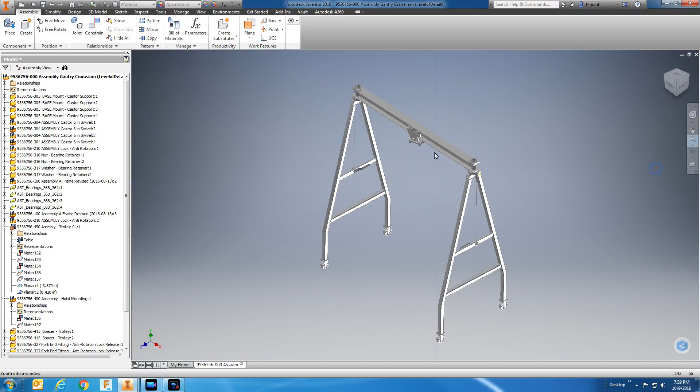So what I'm going to do is zoom in on a window here, and we're going to open this file, and open this A-frame. You can see this part here which we have added is shown over here as a 3 inch by 2 by 1/8.

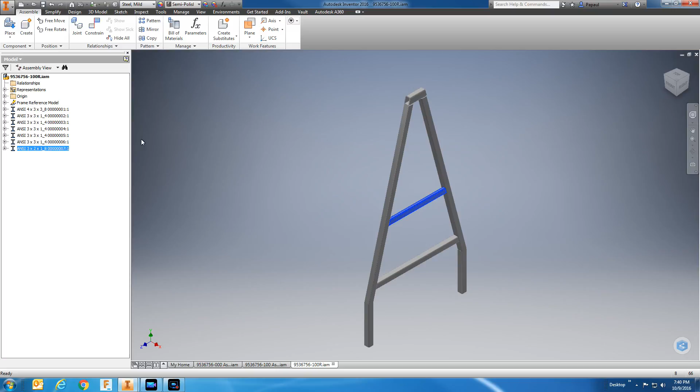It's drawn this way, but in fact it's a 3 inch by 1.5 inch tube in reality. So this tube has been cut and fit, and we're going to now close this file, go back to this one, and look at the detail that has been added here.

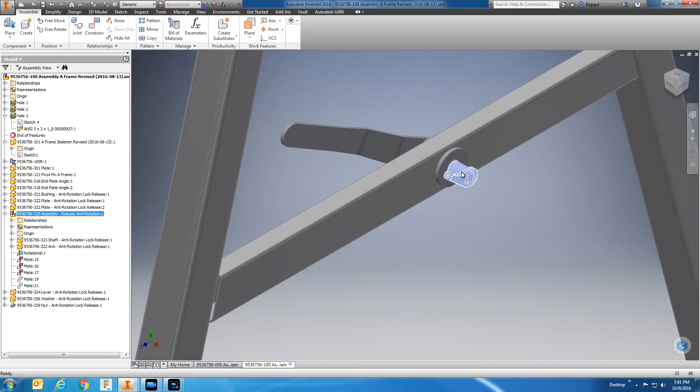So we're going to zoom in on a window again, right here, and you can see that this mechanism consists of a shaft assembly here, and we're going to open that and have a look at the components.

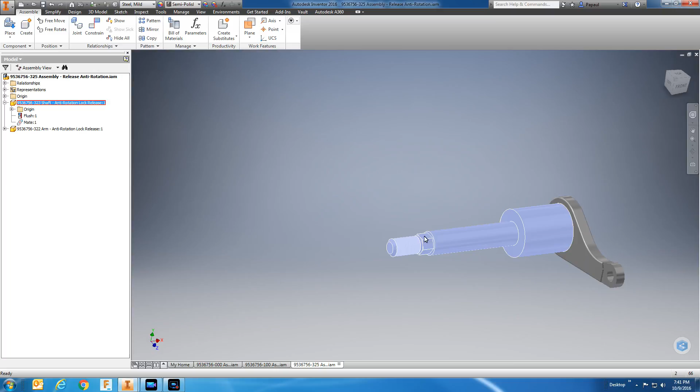So that consists of a shaft and an arm. The shaft has hexagonal surfaces here on which the lever arm will be mounted. It's threaded. This is 1/2 inch. This is 1 inch, and this guy here will be connected up to the anti-rotation lock release pin.

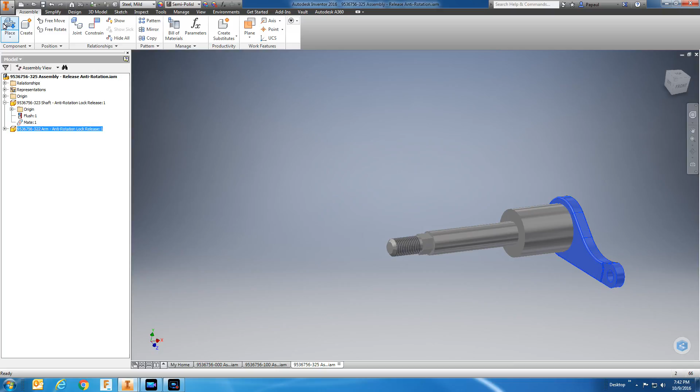So we're going to close this guy here as well, going back to where we were. So again, here's the lever, and we're going to rotate around and look at the other side of it.

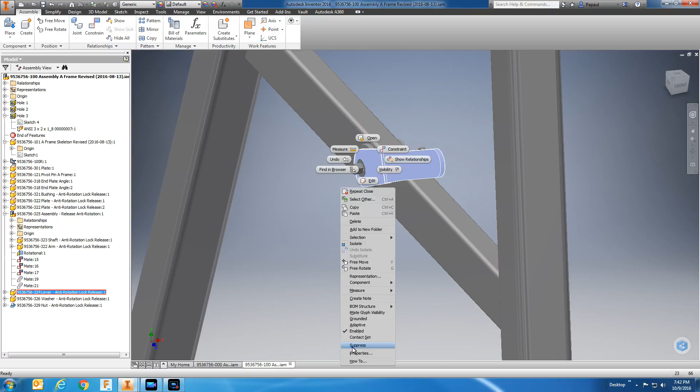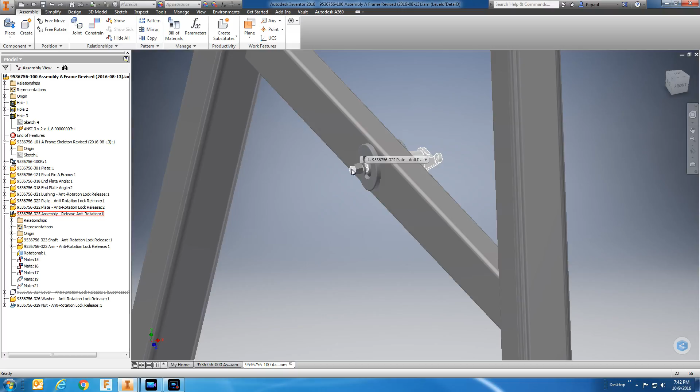We're going to suppress this component. Okay, well, let's save it then, if that's the way it wants to be. And we're going to attempt again to suppress this guy. And you can see that we have a washer here, and we're going to suppress this guy, suppress the nut, and suppress this washer.

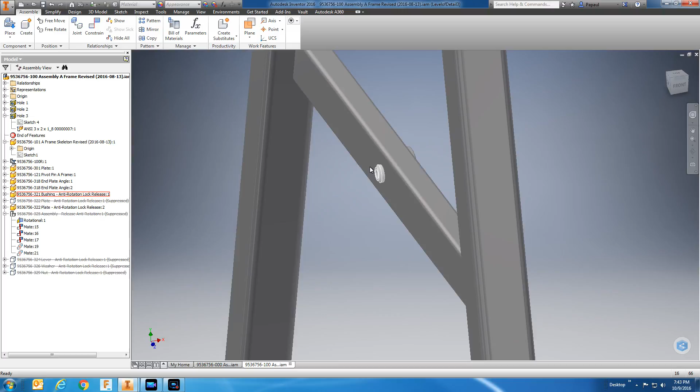And this one here, we will also suppress the washer itself. Now you can see that this bushing has been put straight through. There's another washer on the other side. The chamfer that you see here is for the purpose of welding, and that chamfer here as well.

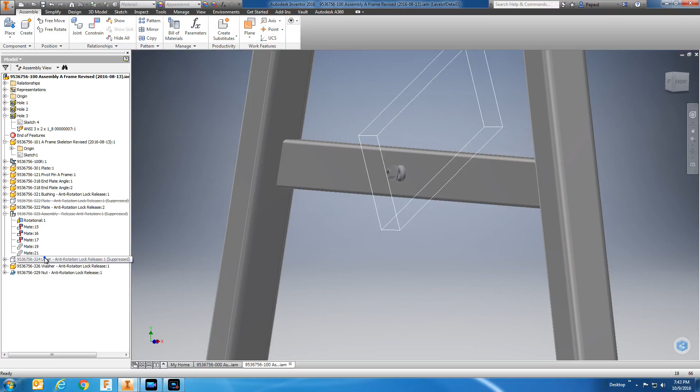So we're going to unsuppress the washer, unsuppress the nut, unsuppress this guy, and unsuppress this guy. And the last one is the lever.

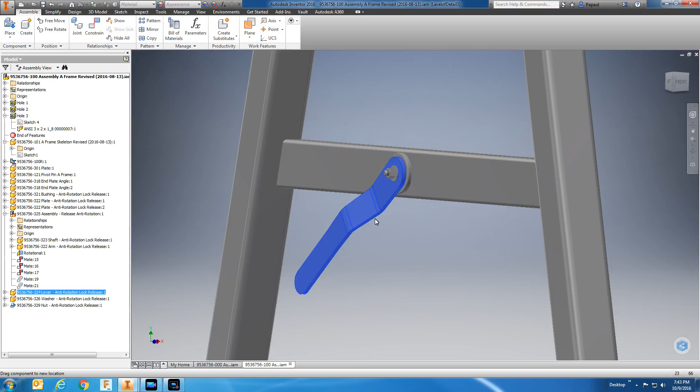And so this lever can be rotated up and down, and if you look up here at the top, we don't have the anti-rotation lock mechanism on in this view, so we're going to close this view down.

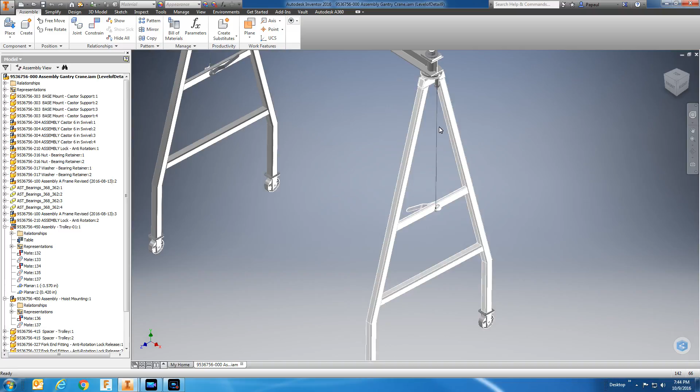And you can see that the anti-rotation mechanism up here, the pin, is attached via a cable down to this point. So we're going to zoom in on that window so you can see those components.

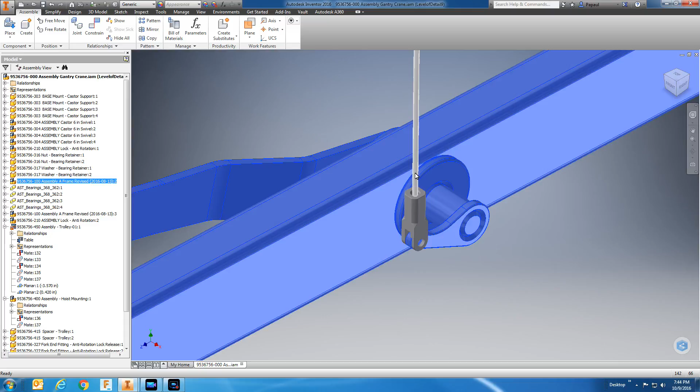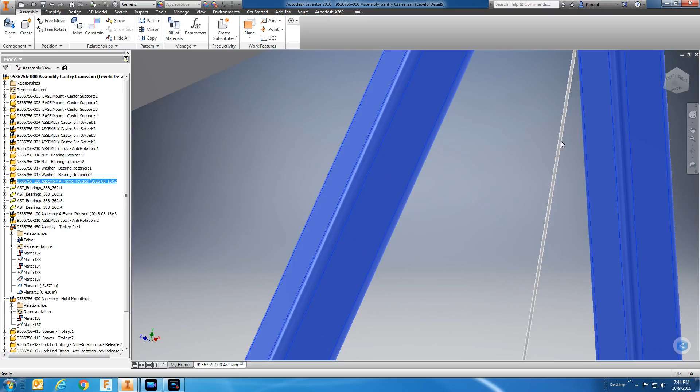And you can see there's a fork that's been made, a cable. And then we look here, and you can see as well there's another fork.

That has been attached up here to the lock pin. And by operating the lever, the lock pin is retracted, and then this complete frame assembly can be rotated on this pin that's in here, this pin right here.

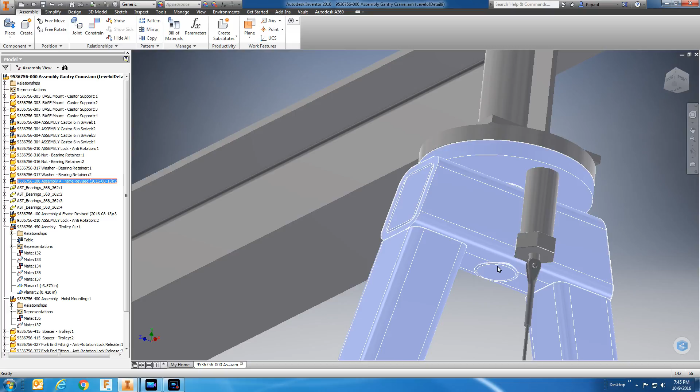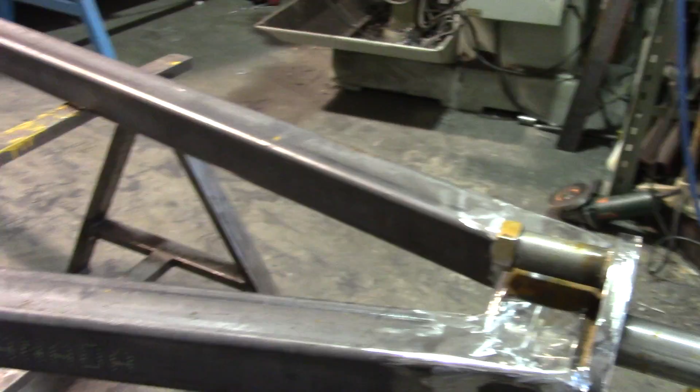So what we're doing today, and I'll talk about this in the introductory video, but we've added this beam here. It's a 1.5 inch by 3 inch by 3/16 wall piece of tubing.

We put a bushing through it. We put a washer on each side that's 1/4 inch thick, and we welded that in place, both sides. That's going to be the pivot for the anti-rotation release mechanism. I'll talk more about that in the introduction to this video, and you'll see how it's going to work.

So we've clamped up this piece of tubing, as you can see. We're going to put some tack welds on, then turn off the camera, and come back after we've tack welded to do a close-up of the welding. So bear with me for a second. The welder's all ready to go. I just got to put on some gloves and do some tacks.

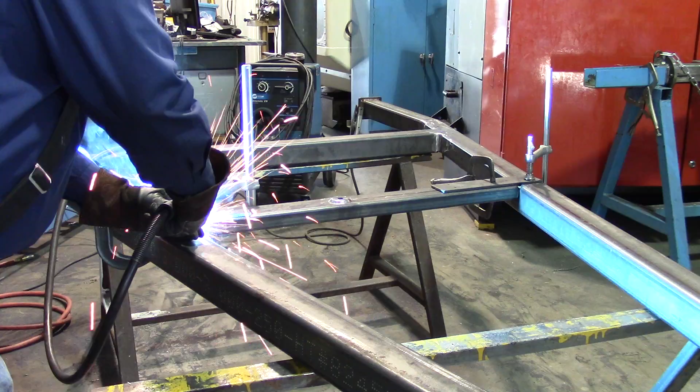Come around behind you. Crowded, small shop presents problems all the time. Okay, so that's fairly solidly tacked.

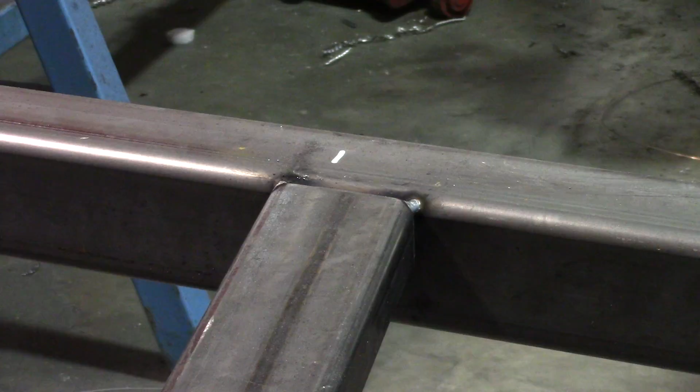Okay, I'm going to turn off the recording, and I'll get back to you once I've set up for a close-up for some of this welding. We've repositioned the camera so you can see the weld a little better, and we're going to zoom in on the area that we're going to be welding on. Right there. Let's see how that works. And I'm just going to go around and get set up and start welding.

So like I've done in the past, I will do a small root pass. Then what I'm going to do is reposition, shut off the camera, reposition myself, and do a downhand weld on this side and on this side, but I'm going to do that after I do this same pass on the other side. So I'll shut you off and come back, probably when I get to doing the downhand.

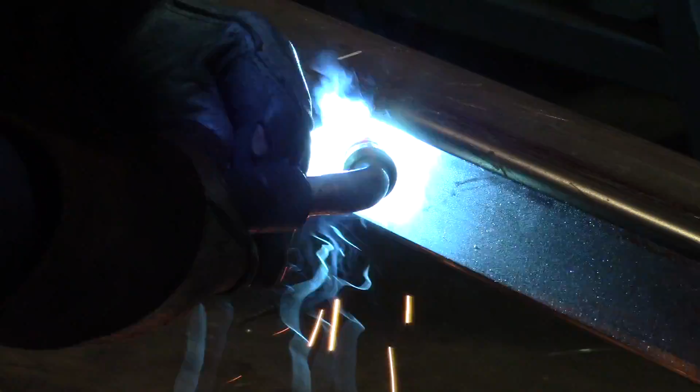So what I'm going to do is weld down on what's called a downhand weld, and I'm going to start from the top and work my way down. And then that was the root, and I'm just putting a wider bead on there to fill the radius.

And now on this side. And this filler pass on top of the root.

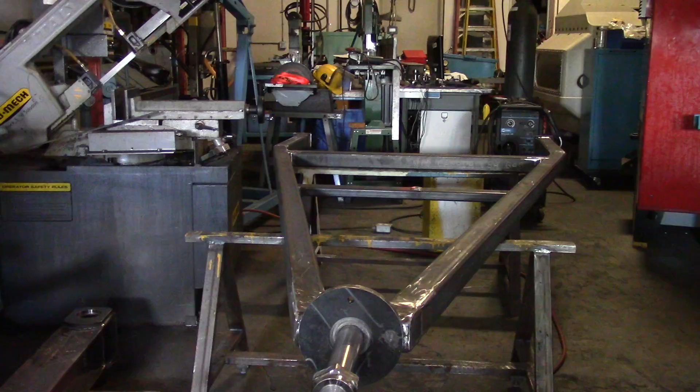Well, we're coming to the end of a long week. It's been tiring and dirty. We have now finished both of the A-frames. The beam was finished last week. We've ground all the welds that we're going to.

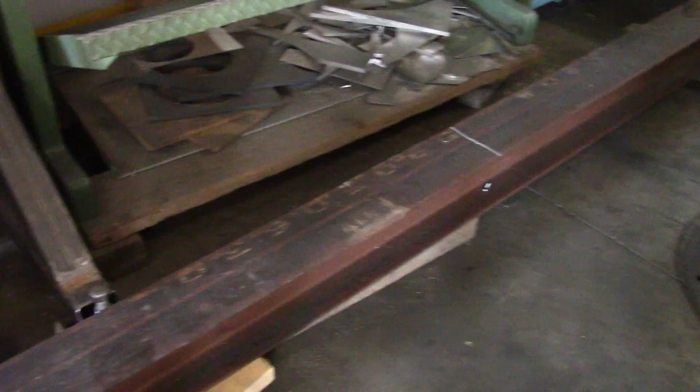The next step on these beams is to transport them over to the powder coating shop and have the fellas there glass bead, prime, and powder coat them. Going to have it powder coated in a bright yellow. There are some components on the beam and on this A-frame where I don't want them to sandblast and powder coat. As an example, this pivot here, and on the beam you'll see it down there. I don't want that recess that's been machined for the bearing to have anything in it.

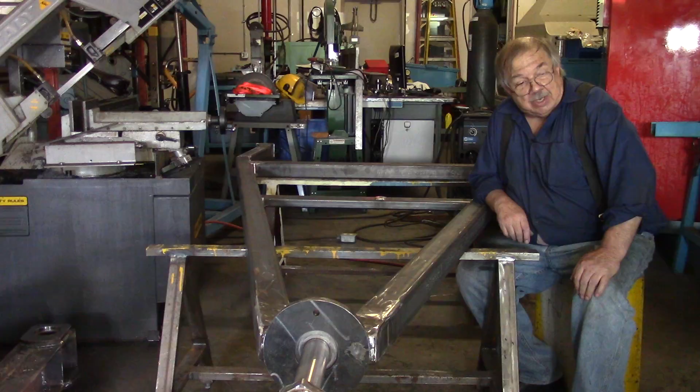So, as I say, it's been a long week, and as you can see, the shop has gotten pretty dirty. Yes, it has. I'm not sure if I have enough energy to come in tomorrow and clean up the shop, and if not, then it's going to have to be the first project on Monday morning.

I have enjoyed this gantry crane. I'm looking forward to assembling it and putting it to work, and we'll be talking to the fellows at the powder coating shop to see if they'll allow me to video and document the processes they use to powder coat it. I think it would be very interesting. I've used this shop a couple of times, and they seem to put out a pretty good product. They're local, about 3-4 miles from here.

I'll transport these over there in the back of my pickup. Might have to make a couple of trips. On the way back, after they've been powder coated, I'll probably have to arrange for somebody with a flatbed, see if I can get a friend to bring them over on pallets, so that we will handle them minimally and protect the new powder coat that's on them.